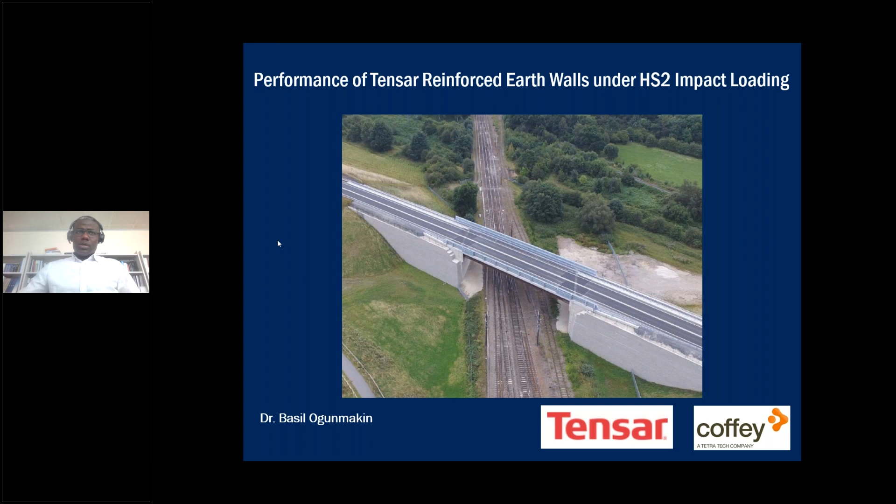A quick overview of the outline of the presentation. I'm going to give an introduction as to why we carried out this research, what the objectives were at the time, and what we hope to achieve through the research. Then I'll present the methodology of the research, how we went about it, and then the conclusions of the study.

Part of that then goes into, if we are able to show that we can use reinforced soil structures as part of bridge design for high-speed train or in high-speed train environment, what sort of repair solutions do we have to have in place should we have the unlikely event of a derailment? And then as part of that, is to look at what are the commercial benefits, what are the carbon benefits of that, how sustainable it is compared to the alternative conventional reinforced concrete structures.

And then the summary and then questions from everybody, if there is any.

The key objective of this research is to answer two questions: is Tensar reinforced wing wall a viable solution to accommodate impact loading due to train derailment?

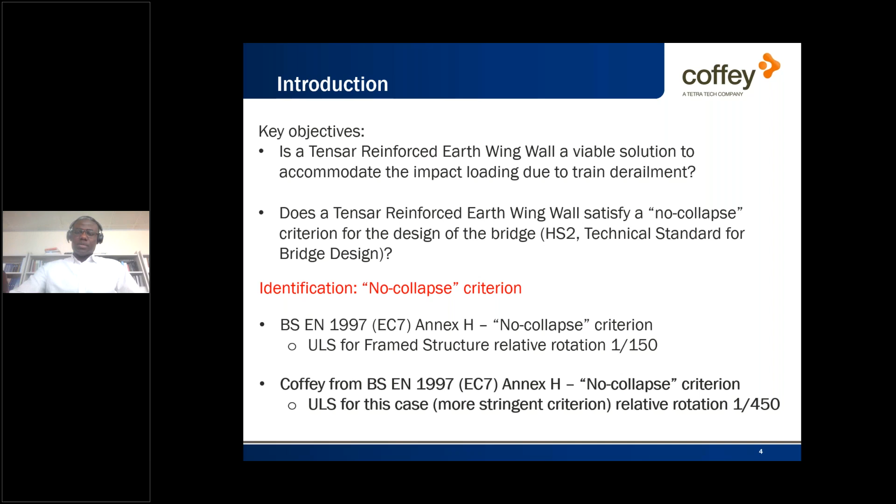Now, how did we go about this study? We used an already designed overbridge along the HS2 trace.

So we chose a bridge within the C2, C3 section, which is constructed or being constructed by EKFB. That's a JV between Eiffage, Kier, BAM, and Ferrovial. And their designer for that section is Arcadis and Cowi.

Now, the key principle for design for impact loading is in the standard that I introduced earlier: it's to avoid impact loads where possible, and where such is not possible, to design for a protection section of the wall. So there's a protection, and we're going to see it in subsequent slides where I'm going to be referring to protection wing walls and non-protection wing walls.

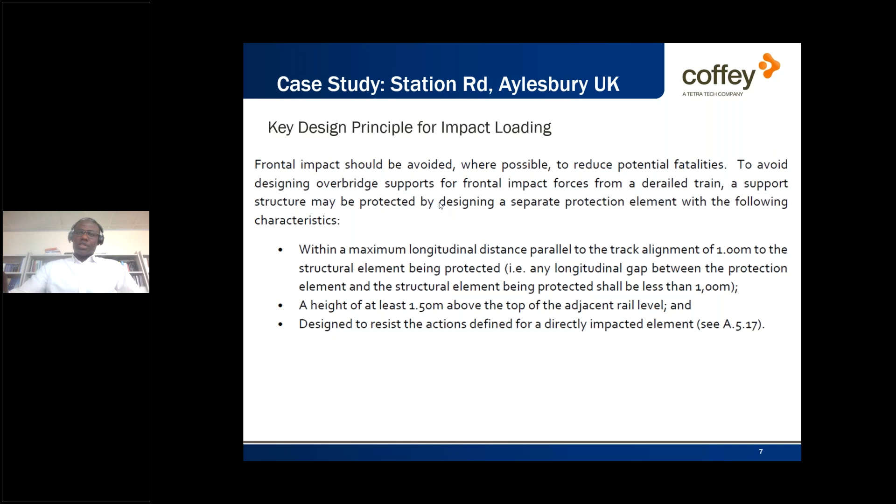But essentially, this slide defines that where you are unable to avoid an impact, then within a certain distance from the actual bridge structure itself, you do have a protection zone and a non-protection zone, which is shown on the next slide here for the case study that we considered.

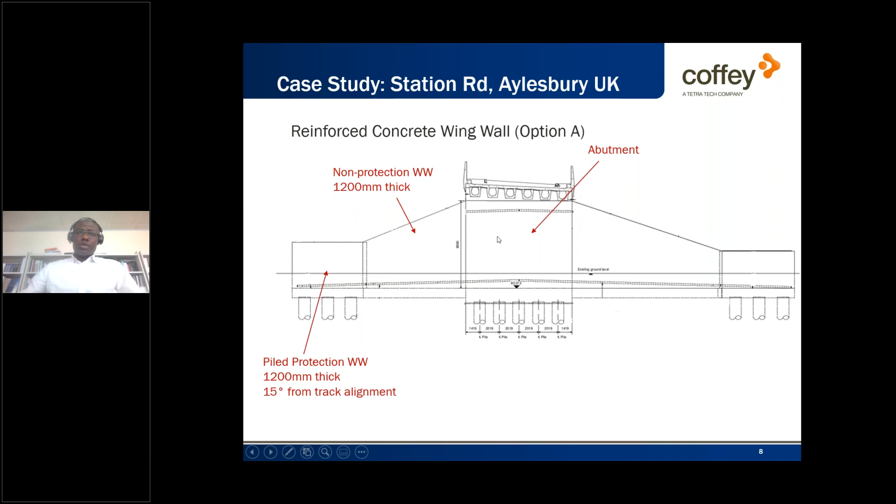So the wing wall immediately adjacent to the bridge abutment is what is defined as the non-protection wing wall here, and the protection wing wall, which is piled. So the abutment is piled, the protection wing wall is also piled, and it's at a 15-degree inclination to the bridge abutment, which is parallel to the track. So the abutment is parallel to the track, and then the protection wing wall is inclined at 15 degrees away from the non-protection wing wall and the abutment.

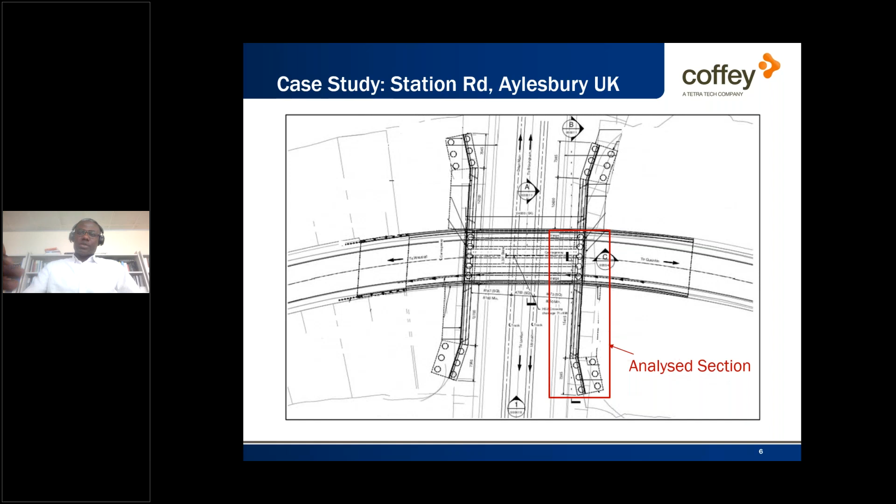So in the model that we built in 3D FE analysis, you will be seeing all of these various sections defined and referred to throughout the rest of the presentation.

So we refer to the reinforced concrete option as Option A, which is the initial option. Then Option B is now what we're trying to compare the performance of, the Tensar reinforced earth wing wall. This outline is a standard detail that we would adopt for designing such a reinforced wing wall for any other type of bridge. So there is nothing special over and above the usual Geogrid design for use in a bridge abutment or wing wall.

The material properties that we chose for the soil within the wing wall is what we would normally use for granular material or granular fill at the back of a structure, which we generally classify as Class 6N or Class 6 FI. And what we've got here, friction angle of 36 and material unit weight of 19 to 20, is commonly used in such environments.

Now, looking at the facing of that structure, we've got to have facing panels. So we chose 1 meter by 1 meter concrete panels, 200 mil thick, within the non-protection zone as well as the protection zone. And each of those sections is about 14 meters in length.

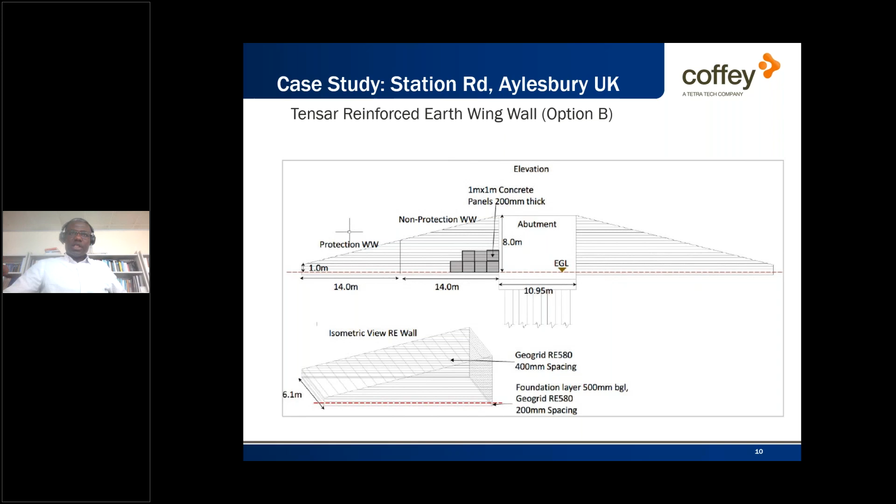What the key difference between Option B and Option A is, as you can see from this slide, Option B has only got a piled abutment. So the reinforced earth section is not piled, it's all on shallow foundation.

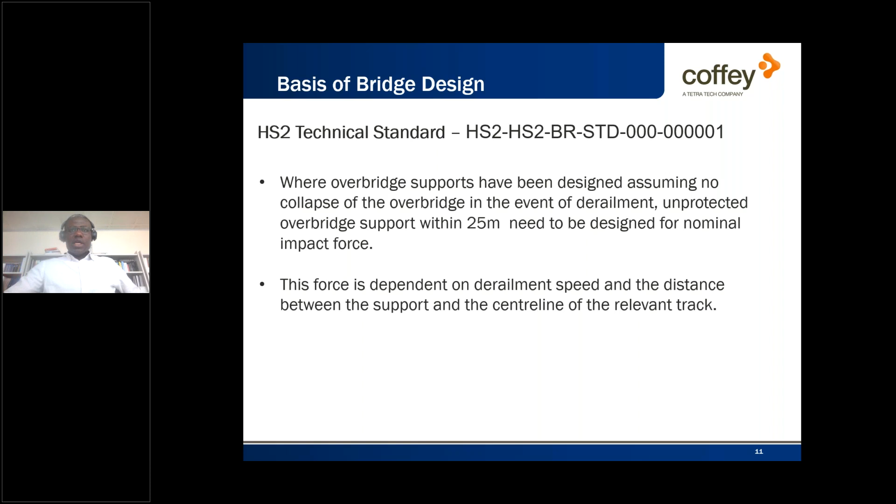Now, we're going to look into how we define the forces that go into the protection wing wall and the non-protection wing wall. The standard says where overbridge supports have been designed assuming a non-collapse criterion, in the event of derailment, the unprotected support within 25 meters needs to be designed for impact force. So the force is dependent on derailment speed and the distance between the supports and the center line of the relevant track.

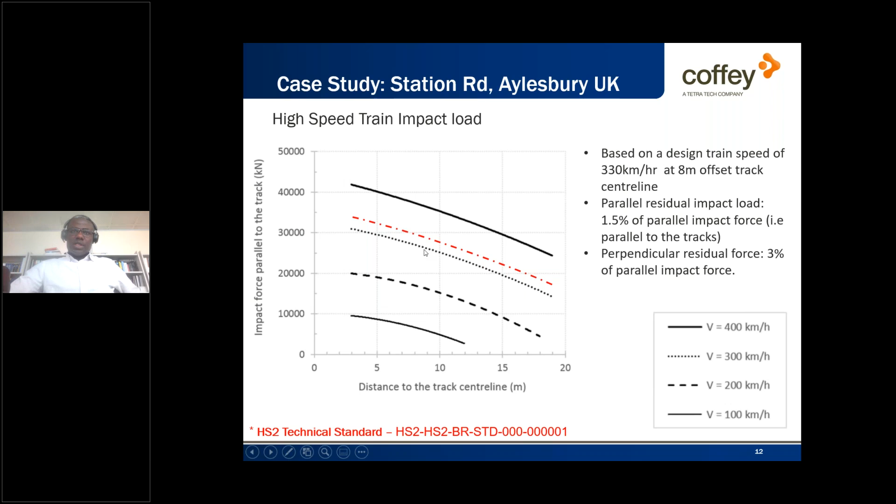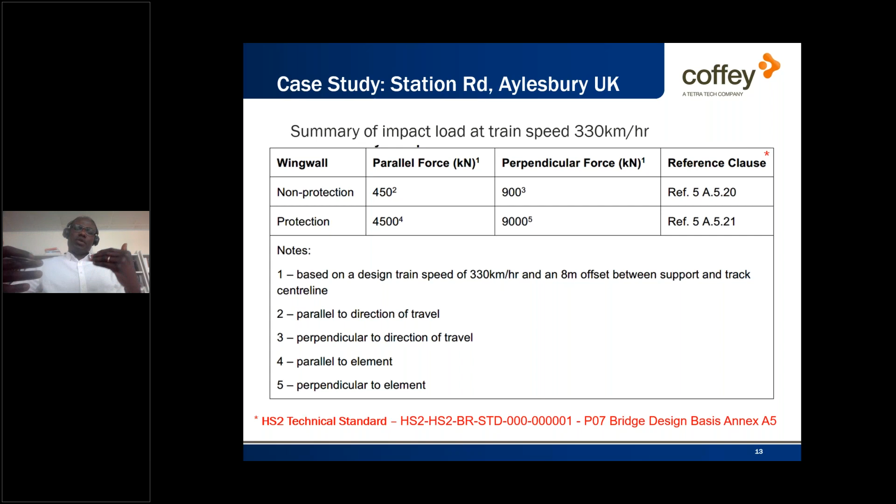So that is summarized on the next page, the load we considered for the protection zone and for the non-protection zone. The load is applied as a line load at about 1.5 meters above ground level. The other main difference you can see from this table is about a 10% difference in the load applied to the protection wing wall versus the non-protection wing wall, which allows us, when defining such load, to take into account how it propagates from the protection wing wall all the way back to the abutment.

Now, looking at the result, I expect there may be a little bit more question about the details of the material models. If anybody is interested in that, then I can give a bit more detail on the material models considered, the strength of the properties for the wing walls and for the piles. Can provide that later on.

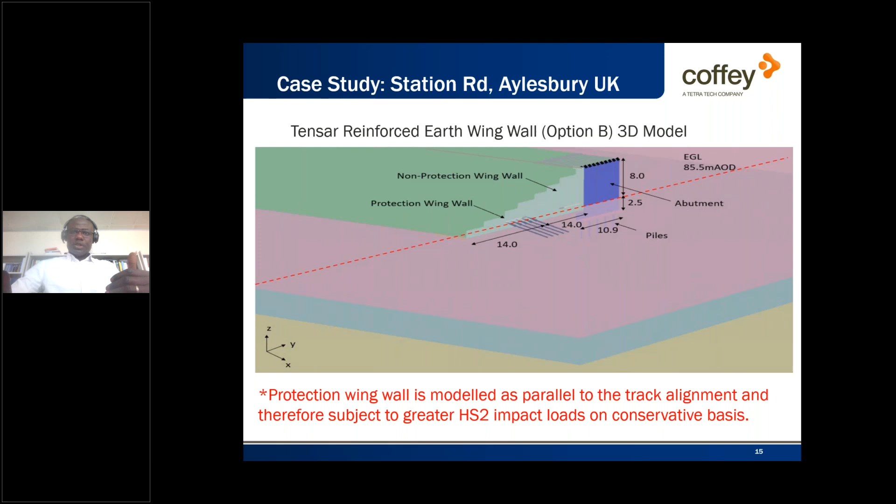Now, what we have on this slide is comparing the performance of the piled and the wing wall alternative, looking at the abutment, bearing in mind the 1/450 acceptance criterion that I presented earlier.

So we looked at the relative rotation of the wing wall, and what this is showing is following the application of the impact load of the derailed train, we only measure about 1/2000 relative rotation in the wing wall, which is substantially less than what is considered acceptable.

On the right-hand side we have the reinforced earth wing wall. On the left-hand side we have the reinforced concrete wing wall, which, though the number is not shown there, you would expect is substantially less than 1/2000.

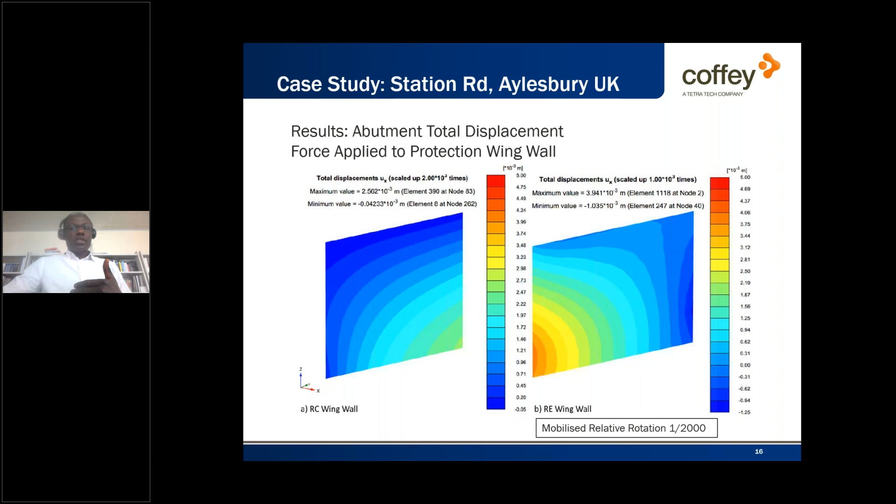But the main focus of the research is to check: can we satisfy the 1/450 with the reinforced earth wall alternative? And how does that then propagate from the point of impact all the way to the abutment? So the abutment here is the structure that we're trying to protect.

We can see for option A, which is the piled reinforced concrete alternative, we've got a relatively contained, small area of deformation. The extent of deformation is only about 10 meters, and by the time we get to about 10 meters away from the point of impact, the magnitude of movement is down to roughly around 5 mil.

At the point of impact, with the deformation here, we've got close to about 100 mil movement immediately at the point of application. But more importantly, that decayed very quickly, and by the time we get to the bridge abutment, there is relatively no impact on the abutment.

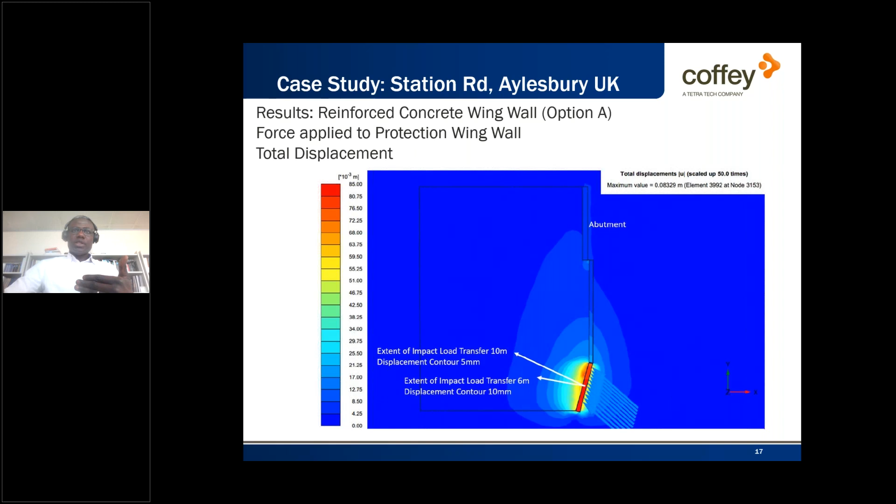Compared to the reinforced earth wall alternative, the zone of deformation and the zone of damage is substantially bigger. And you would expect that because this is now the difference between the piled foundation option compared to the shallow foundation reinforced earth wall. Now the crater, or the zone of impact, is not 10 meters.

That propagation is as far as about 18 meters away from the point of load impact. And at 18 meters, we're still getting more than 5 mil - we have about 10 mil movement.

But more importantly, the zone of damage is substantial at the point of impact. But as we move towards the abutment, which is the bridge structure that we're trying to protect, the dampening effect of the soil reduces the impact very rapidly, so that at the bridge abutment there is relatively low impact on the bridge.

One of the things that we're going to see later on is actually the movement of the abutment - the relative movement of the abutment following such impact is less than 1/450, which we consider as an acceptable position to demonstrate no collapse of the bridge structure under such impact load.

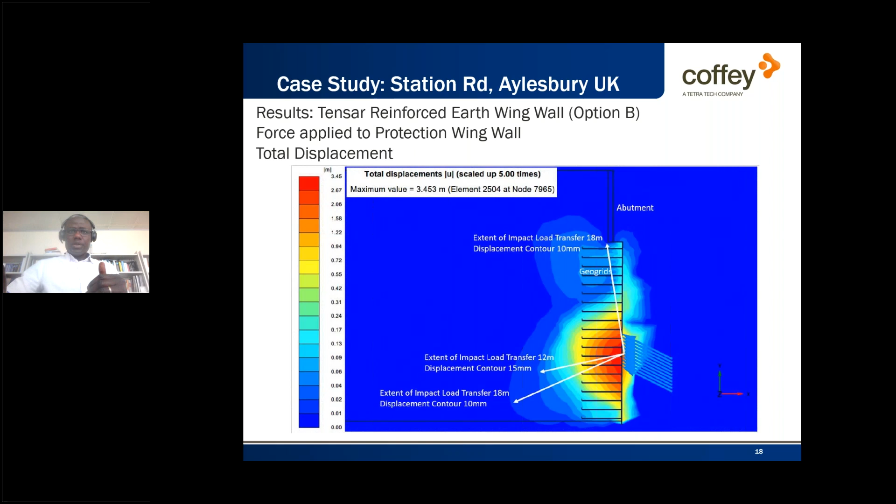So for the bridge structure, we can show by the outcome of those analyses and looking at the deformation pattern and the propagation of those deformation all the way to the bridge, that the bridge is not going to collapse.

But then we are still left with a damaged wing wall. So this particular slide here indicates that the wing wall is going to be substantially damaged. Now, what does that mean, and how do we assess that in terms of - this is a geogrid reinforced wing wall.

Looking at the geogrid element, the area with the stress concentration here, the areas that it's shown will be substantially damaged, again not surprisingly, because this is where we apply our impact load.

The other thing that we checked, not presented here, is the mobilized strain. The way geogrid mobilizes resistance is through movement, within a certain strain level. And when the geogrid elements are stressed or strained beyond a particular limit, then they are no longer able to perform the same function if left in place without replacement.

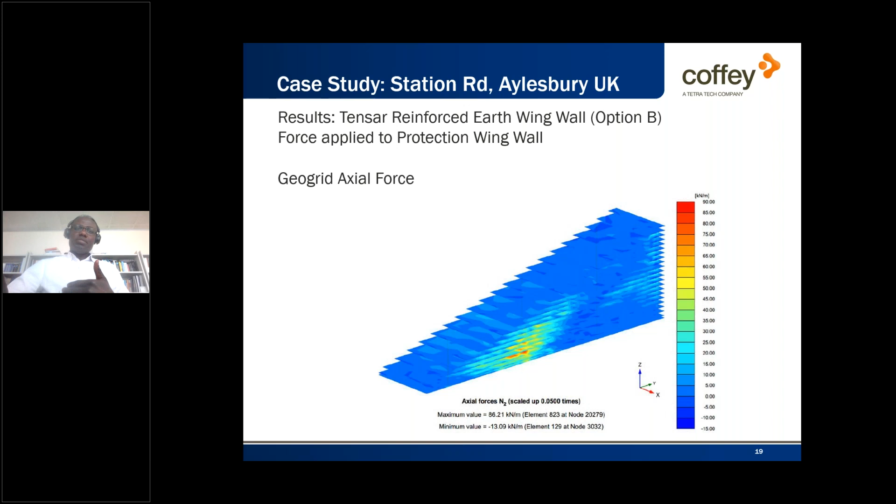So what this has shown here is the geogrid will be damaged and will be strained beyond their ultimate limit, and will need to be replaced.

Now, to look at the non-protection zone - because the forces that I've shown so far have been the application of load on the protection wing wall, and the non-protection wing wall is immediately adjacent to the abutment - we applied a 10% reduction in the impact load, which is how it's classified in terms of impact loading on the non-protection wing wall, and looked for the same level of performance and propagation of deformation and stresses to the abutment.

And what we also showed in the analysis is that the impact of such load and its effect on the bridge abutment is actually substantially less than 1 over 450. We've got relative rotation of 1 over 21,000 here, which indicates there will be relatively no impact on the abutment, and we are able to demonstrate that the abutment and the bridge structure are not going to collapse under such impact load.

So that leaves us with a conclusion that geogrid reinforced wing walls is suitable and will not result in the collapse of the structure under the sort of impact loading that we have considered in this study.

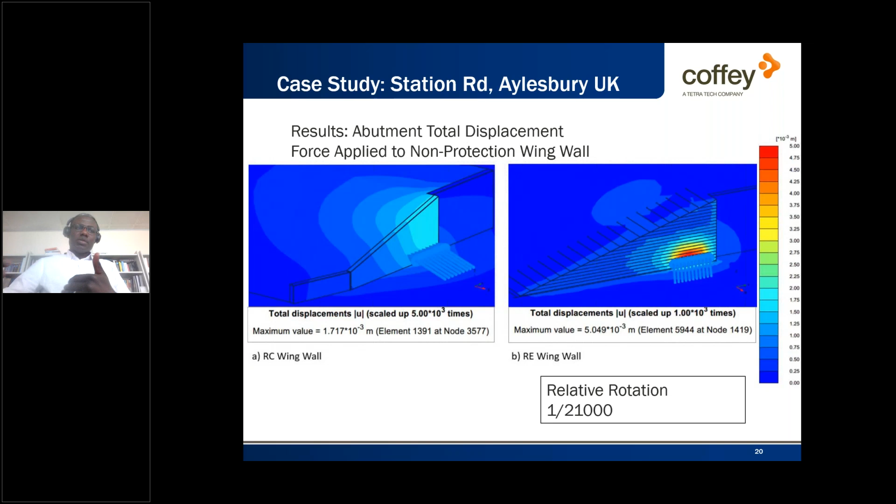We recognize that we've taken a case study based on a particular bridge structure and a combination of distance of the load application, so the distance of the abutment to the railway line determines how much load gets applied to the wing walls. There may be other structures where the railway line is closer to the wing walls, where the load application will be different, or where the orientation of the wing wall to the railway line differs from our case study, and the outcome of such analysis would be different. But for cases similar to the one we've considered here, the outcome is clear that the bridge is not going to collapse under such impact load.

We then need to look at whether the wing wall will no longer be serviceable, or is it still serviceable? Can we repair it? So this is the bit I'm going to go into next.

We've identified that the zone of concentrated damage is, as shown there, approximately 9 meters that will be damaged and will need to be repaired. Tensar have a standard repair option that can be considered for this. The geogrid will no longer be able to perform, so it will need to be removed, excavated and replaced.

The concrete panels, which are the facing to the geogrid reinforced wing wall, will also need to be replaced. One of the examples shown here is a place where that has been done before, though not in a high-speed train environment - I think this was taken from an earthquake environment where the geogrid reinforced wall was damaged. What we show here is a repair detail that can be adopted to repair the geogrid: it's excavated out, replaced, and then the rest of the facing panel that is still structurally suitable is connected to the zone of damage where a new set of panels would need to be constructed.

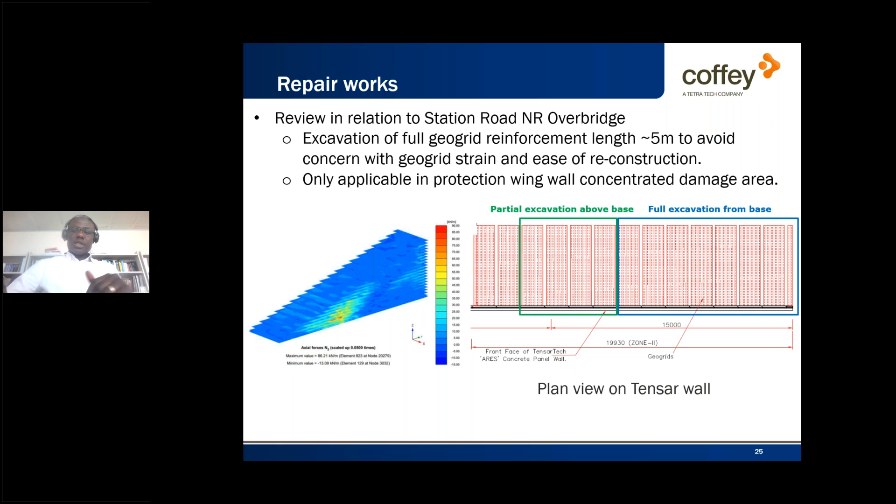We did try to look at the cost-benefit ratio of doing that, because one would have to consider the whole life cost between the upfront cost of reinforced concrete wing walls versus the cheaper alternative of reinforced earth wing wall, having demonstrated that both would work and perform a similar function in protecting the bridge. But for the reinforced earth alternative, the cost of repair then has to be taken into account, which is what the numbers on this list show.

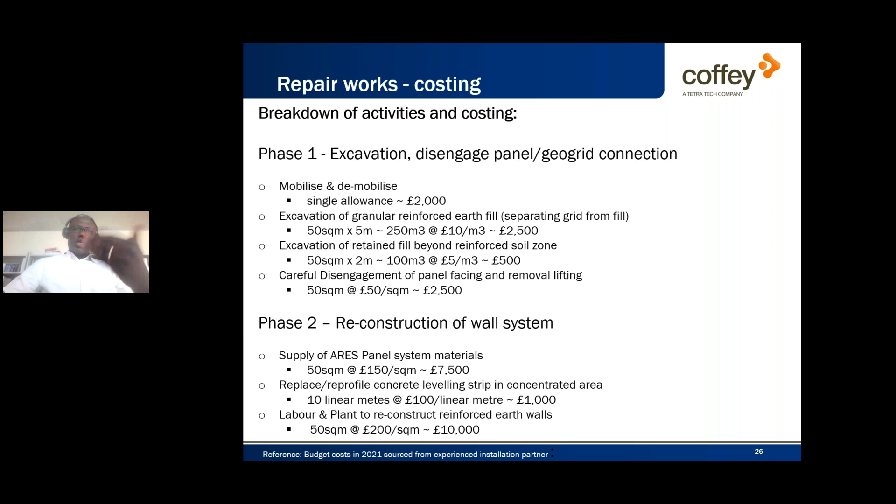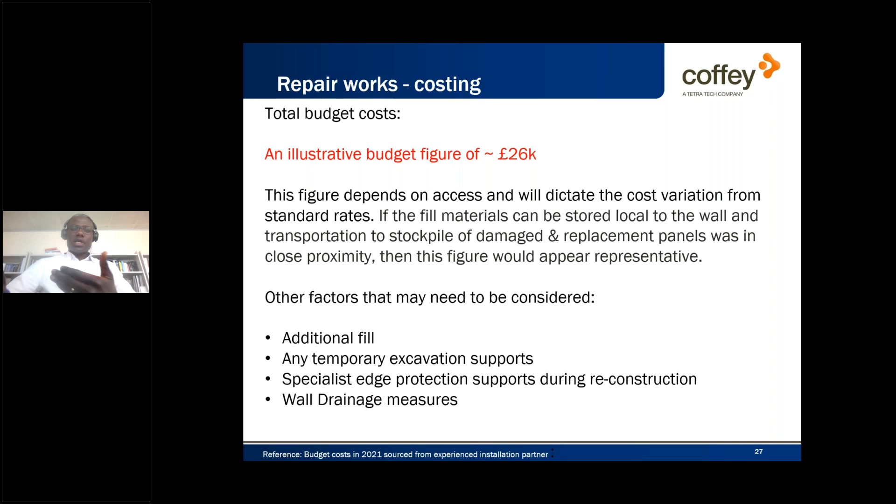I think it would be better to look at the summary. As an illustrative figure, we envisage - the 26K is not an absolute number, it's just to illustrate - there will be a savings in material, a saving in program, which is not costed in this particular presentation. There will also be the sustainability aspect of this in terms of the use of geogrid and soil rather than concrete, which has a much higher carbon footprint.

I'm not going to go too much into the detail of the breakdown of this cost because these are all compared to fixed units, which would differ from bridge to bridge, but approximately this shows there will be substantial savings between the reinforced concrete option and the geogrid reinforced option. Here we're talking about nearly a quarter of a million pounds. But again, this is relative to the size of the bridge and the size of the damage zone considered in this particular study. The bottom line is that there will be substantial net savings between the two applications.

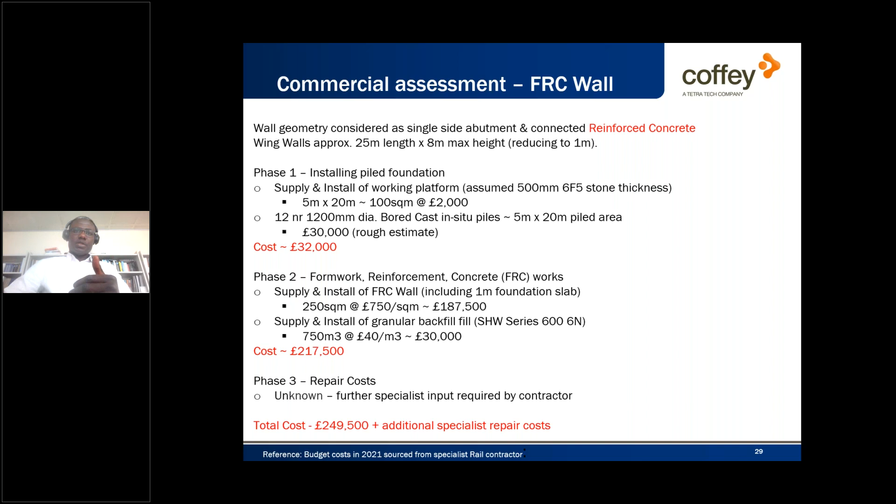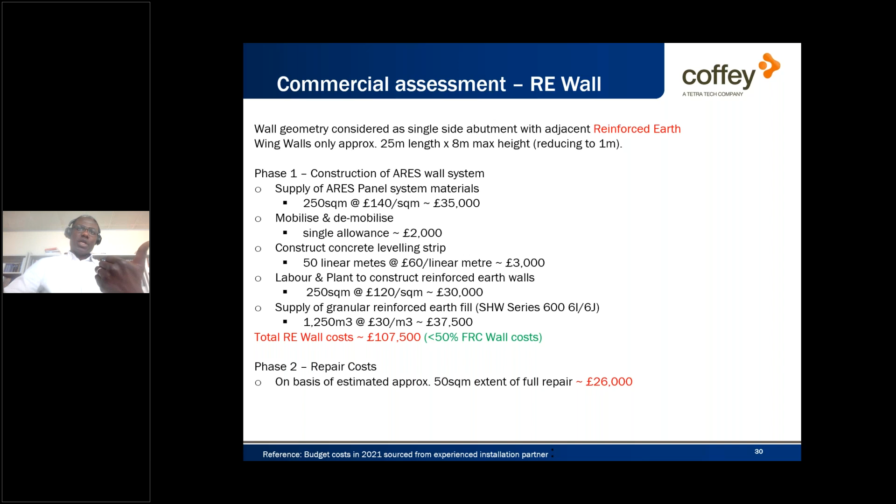It's estimated to be about 50% of that. Again, it's relative to the bridge one would consider. But as an illustration, it's got cost benefit, and also benefit in terms of carbon.

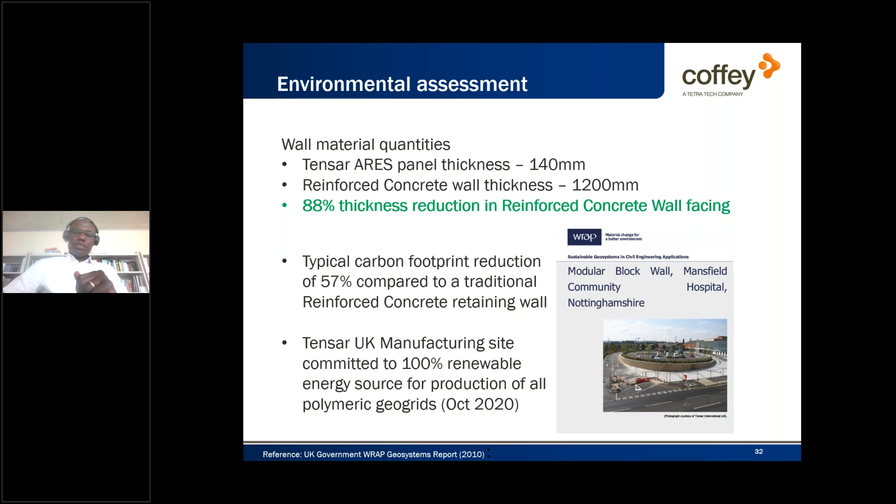There is an environmental assessment study we're currently doing. These numbers are based on separate research we did a few years ago with Tensar, looking at the carbon footprint of geogrid elements compared to reinforced concrete. We said about 57% in that study, but we're updating this based on more recent figures. It may still be roughly 57%, but I can't give an updated number until we finish the research.

And that's the end of the presentation. Thank you. Questions?

Okay, thank you very much, Basil. I haven't got any questions in the chat, but if you've got any, please put them in. I've not experienced reinforced structures myself, so in terms of what the tensile material is and how it's constructed, it would be useful if you could summarize that.

So I'll go back to this - something I missed out. The outcome of this research has been presented to HS2 and the various design houses involved, and has been accepted as a suitable solution for use in a high-speed environment.

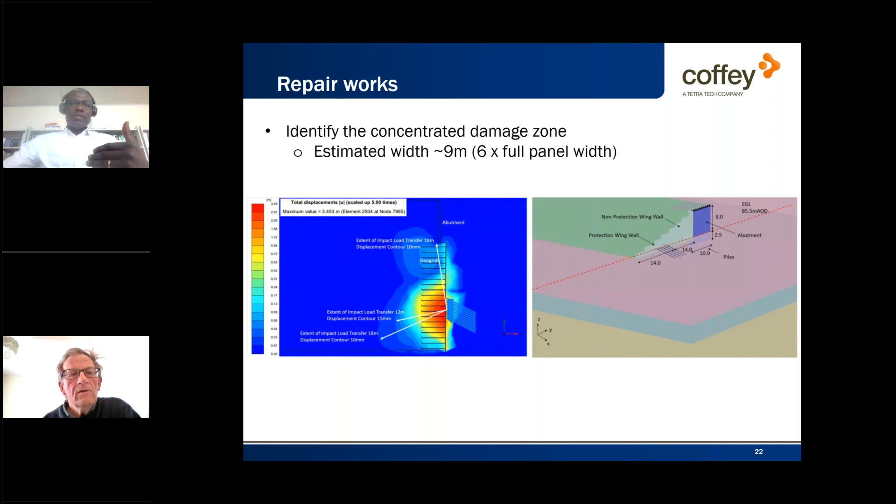With regards to how this is built, we have geogrid layers built in sequence. I've got Peter Matthias from Tensar on the call who might provide more detail. It's built in layers - you've got your geogrid, probably about 400 to 500 mil layers, connected to the concrete panels. The resistance that the reinforced wall derives to support itself as you go up comes from the weight of soil on the geogrid layer and the frictional resistance mobilized as that soil tries to move out. It's pretty much based on friction.

So load times the coefficient of friction on the material, and as you go up, your load increases while your coefficient of friction remains constant, but that supports the face of the structure as you build it upwards.

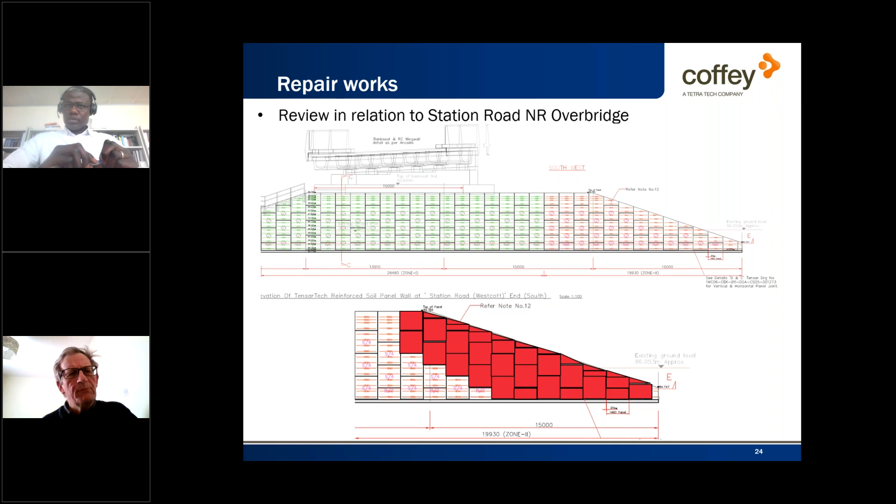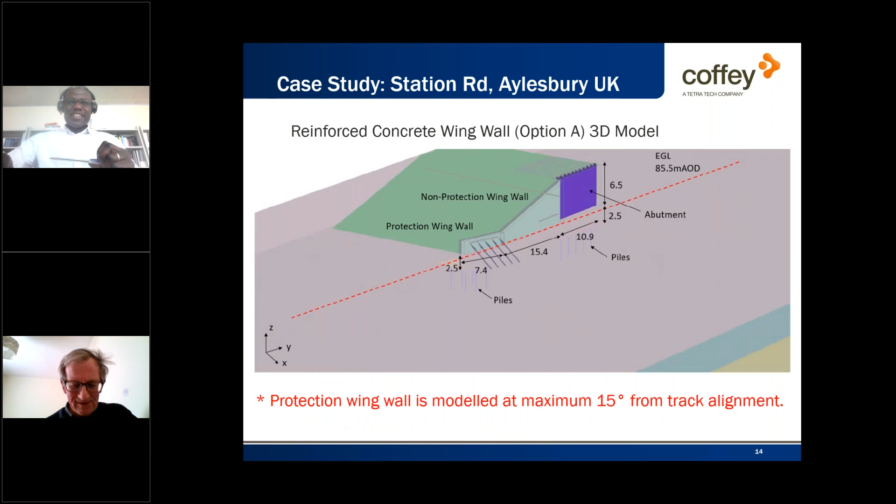So how deep is this lump, that reinforced lump on the wing wall? Sorry if I put it like that - that's a technical term. When you say how deep this is... oh, there it is, 6 meters.

The structure itself, the retained height of the structure, is about 8 meters. The embedment here is only about 500 mil - we've got 0.47, and that's just one of the standard embedment details.

And what I meant by the sequential layering of the geogrid is actually shown here. The dotted lines are the geogrid reinforcements connected to the concrete facing.

So if, in the unfortunate event of a repair being needed, you'd have to dig right back, I guess? Yes - in the unfortunate event of a derailment, even for a reinforced concrete wing wall, such a structure would have to be structurally inspected, and oftentimes there will have to be substantial repair.

We're talking about a train traveling at about 330 kilometers an hour, so there will be a whole raft of other inspections that would have to happen. But specifically regarding repair of the reinforced earth wall alternative, we expect the entire geogrid within the damage zone will have to come out. So the red area here will have to be excavated and then rebuilt.